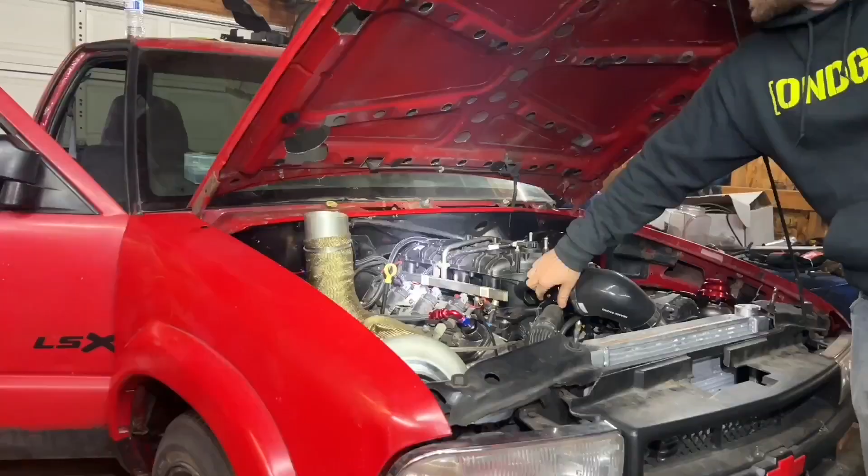We got some snow yesterday, big time. We got like 10, 12 inches of snow. So I figured it'd probably be a good day to mess with the tune on the red truck that I bought. For those of you that don't know, I bought a 2003 1500 HD Silverado, 6.0, 4L80. I've already unlocked the computer, and since we're kind of waiting on weather for the S10, this is the next project, kinda.

So what we're gonna do plans-wise, this truck is getting a cam, springs package, Sloppy Stage 2, PAC 1218s, and we're gonna do a 7875 VS Racing turbo. And it's gonna be basically a daily for me. So I did get rid of the diesel. I traded the diesel for this, not straight up. I traded the diesel plus cash, and there's more than enough on top to do everything I want to do to this and then some. So I think it's going to work out good.

It's not that I hated the diesel. Guys, I can't do anything to a diesel. It's already got a tuner and stuff. I don't want to dig into anything else. This is cheap and easy to work on. So I would like to do a setup where it's on about 10 pounds daily, and I'm going to run a boost controller. I would like to tow the car, low boost obviously, probably no more than 4 pounds of boost towing. I don't really need to explain why you don't want to tow with a lot of boost.

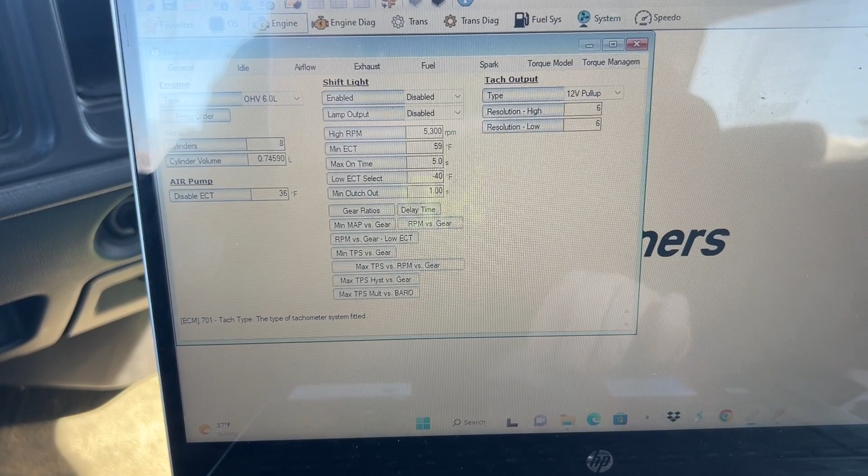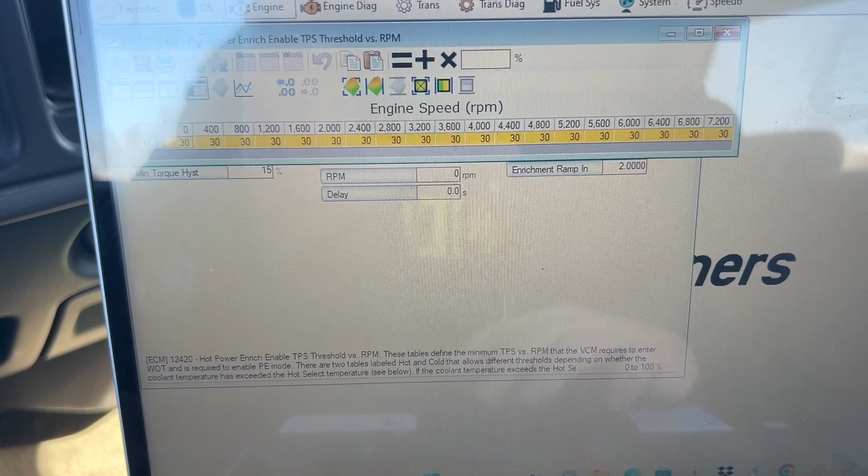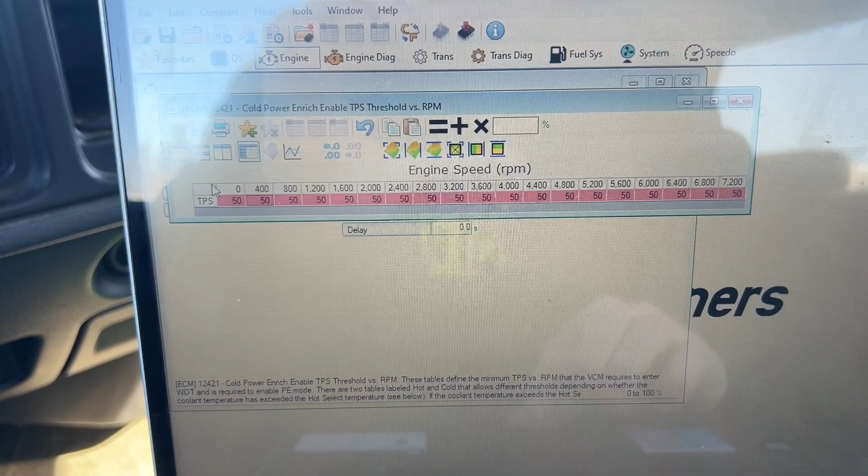All right, sorry about the glare again. I don't know how to really fix that right now. Where are we? Power enrichment. Okay, we'll go hot. See, I got that at 30, so we're gonna put that back to 50. Same thing for cold. 50. All right, I'm just gonna save that. I don't really need to make a new file. It's an easy change. Okay.

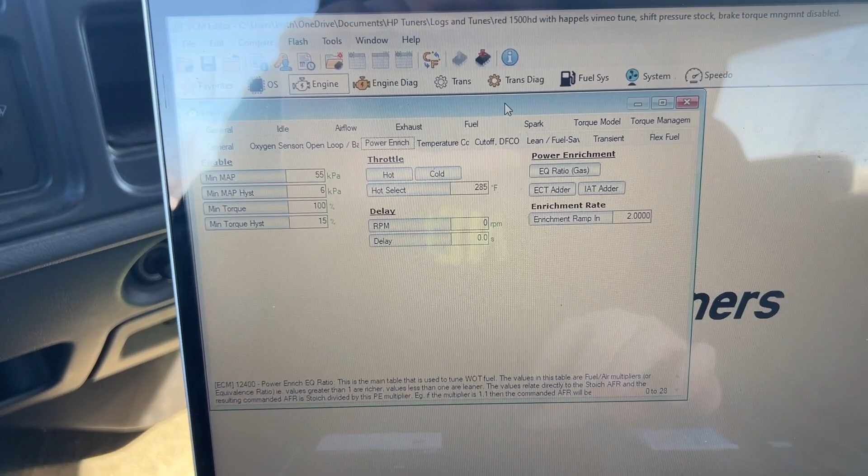Oh yeah, look at all this, guys. Look at that, man. Could hit a jump. Looks like someone already tried. Put some power in this thing. Do some jumps.

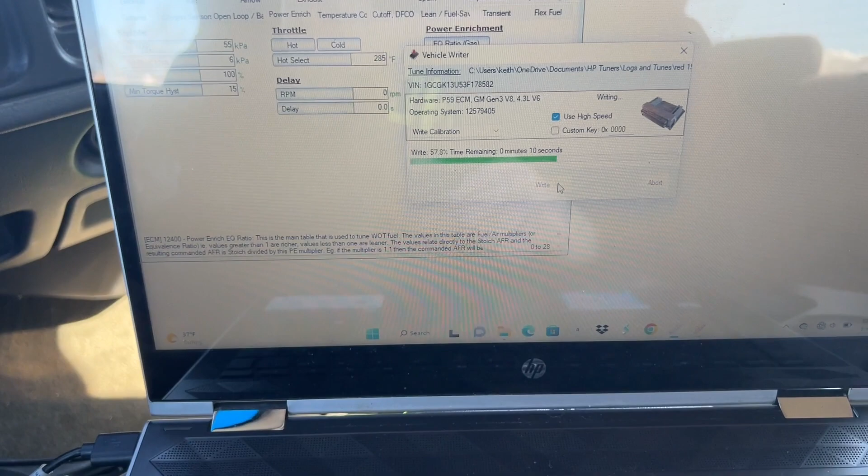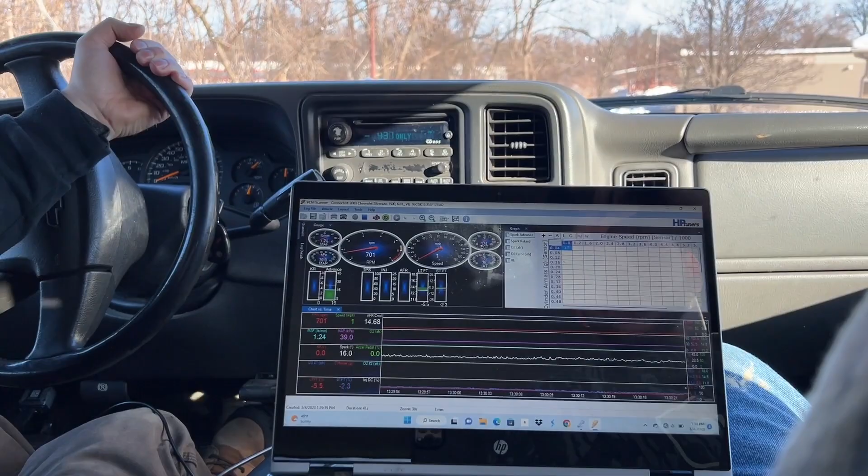It's filming right now. Awesome, here is Austin. All right. Put my safety harness on. Safety belts first, kids. Safety harness. We're all about safety here. You might, not right this second, but you might take it to show them on the screen. Okay, there we go. Yeah, it's probably going to be hard to see. Now that I'm right here, there's shade.

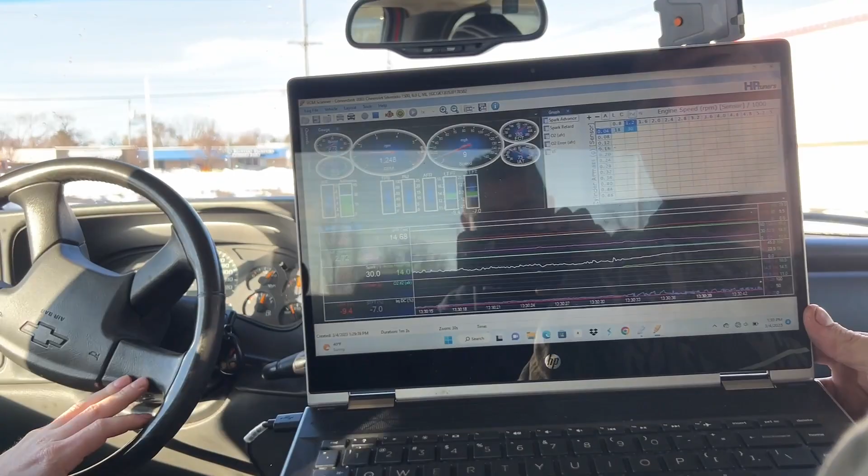Shadow. All right, guys, so funny story. That last clip where you saw me writing the file. Driving home, I actually filmed a pull, and everything worked out like we wanted it to. I got home, and I had so much used up storage on my phone that it cut the video. So, it's all good. Austin and Skylar came over, so we're just gonna basically reenact that, do another data log to show you guys the changes we made and everything.

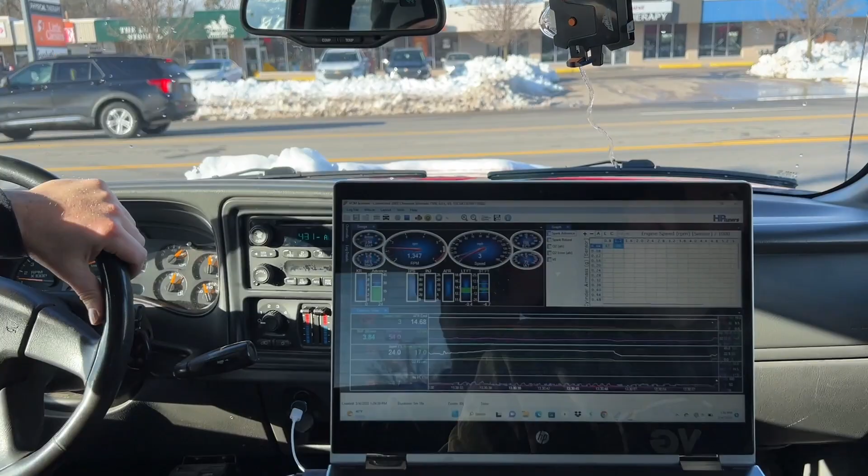So what changes have we made? So here's what I did. I wanted power enrichment to come in sooner, because on these stock trucks, with the stock file, if you floor it, the commanded AFR is 14.68 across the board. So when you're at 5,500 RPM full pull, stock, it's still at a 14.7. This data log right now is all real time. So it's not getting any fuel, therefore you're not getting much power. And it's also programmed to have power enrichment come in after 5,500 RPM for over 60 seconds. Think about those numbers. You'll never hit power enrichment.

So I upped the amount of fuel that goes in, and I cut those times to 0. So I zeroed out time, I zeroed out RPM. So it's instant, well, it's off the pedal. Right now I have it set to when it's 50% throttle and over, which on this is different because it's drive-by wire, it'll get up to like 63%, but that's full throttle. It's weird, drive-by wire is weird. But I have it to where it activates after 50% throttle. So around 30 to 35, you should see this AFR command change.

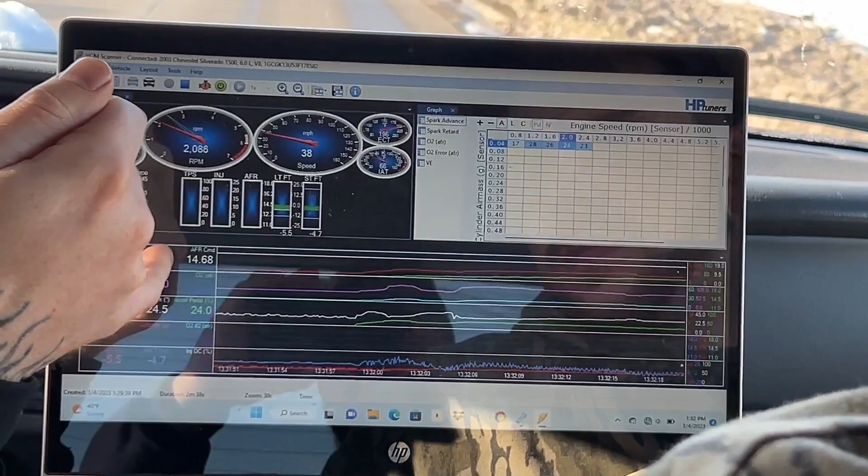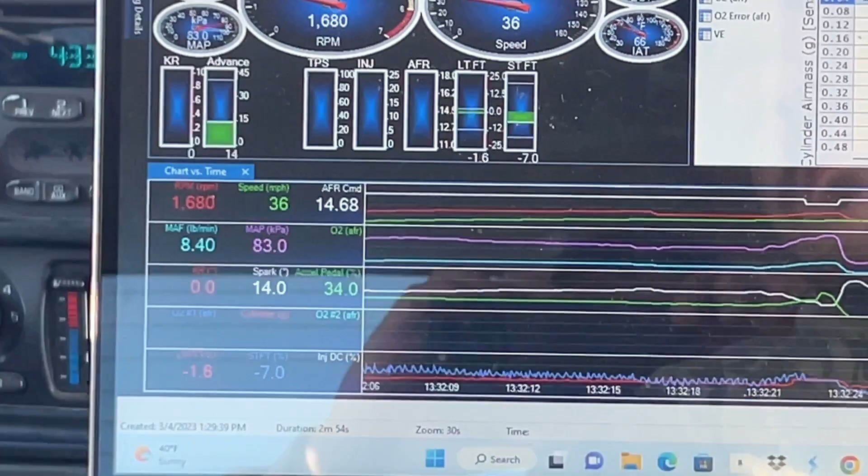So let's try it. Did the number change? AFR command. Only look at this number. So 14.68. When I get past 30-something% on my accelerator, it should change. Okay, sweet. We'll data log and see exactly when it does. Hey, there's a cop. You're at 12.26. Perfect, that's what I'm commanding, so that works out good. So we'll slow down here and just kind of roll into it and see if it's pulling any spark. I was looking at the spark.

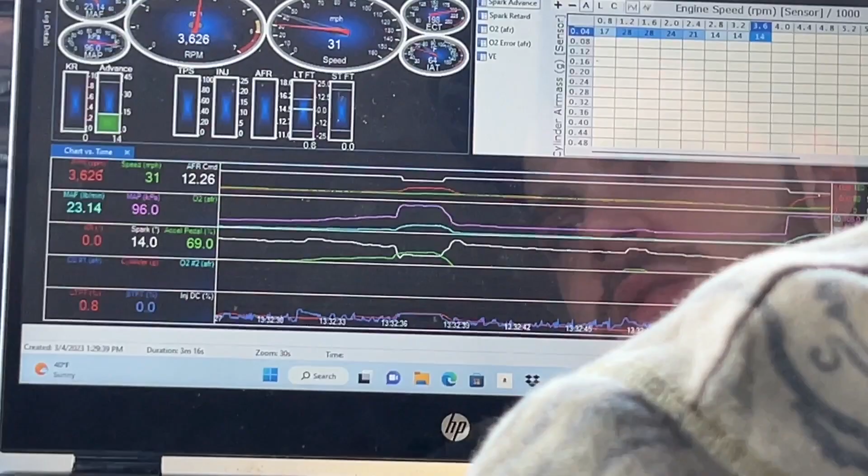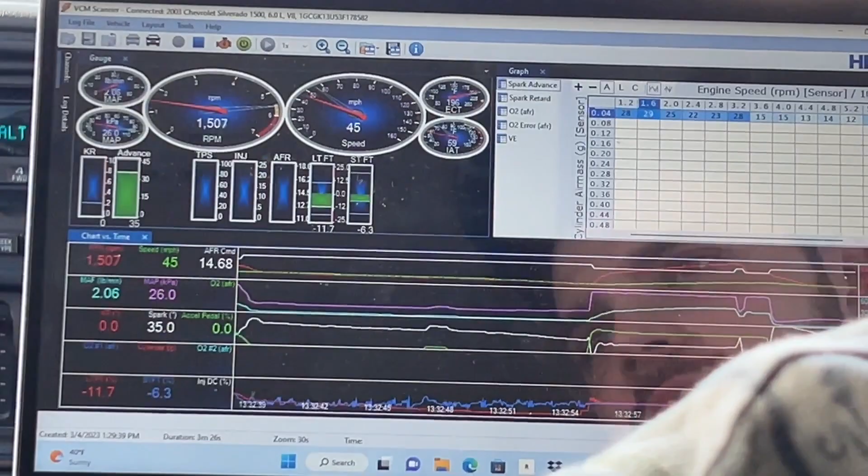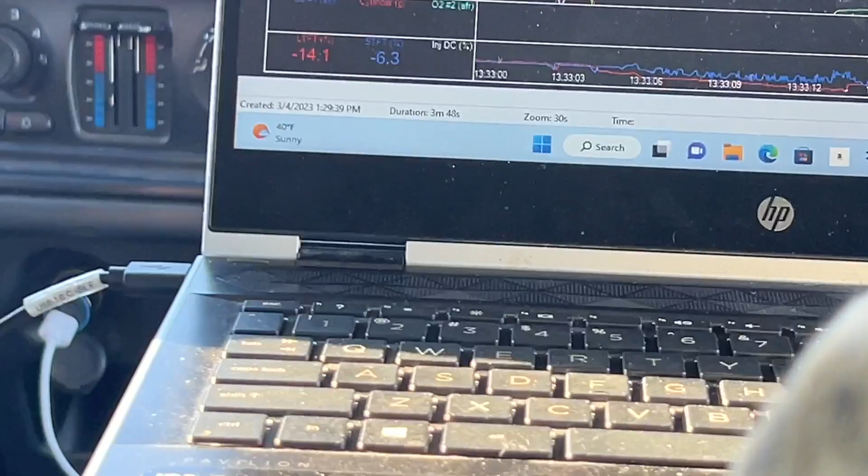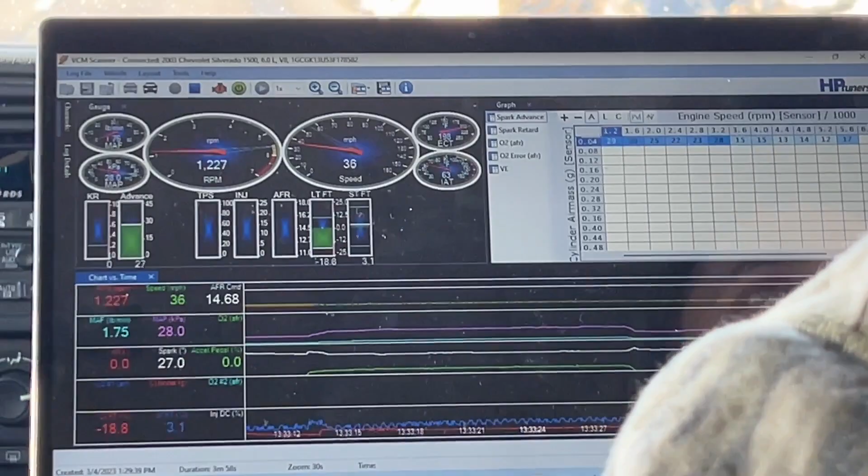14 degrees. 13.5. So 14 degrees of timing? So that's low timing. And I know why that happened. I put my low octane table and copied it to my high octane table, so I can change that. All right, so let's pull over and make that change real quick. But it worked, right? Yeah, it was at 12.2 across the board, and then it was doing its thing. We'll do a couple changes right now, and we'll do it again. I should make the tables the same, but I'll do that when we do the cam and turbo and everything.

Okay, so I added that table back in for the high octane, the timing. We should see more timing, because it was right here and it was at 14. It should be at 16 right there? No, it should be about 20, 21, I think is factory, because I haven't really messed with the timing table as far as numbers individually. Why are you down to like 16 right now? Oh, because that's normal. Stopping, dude.

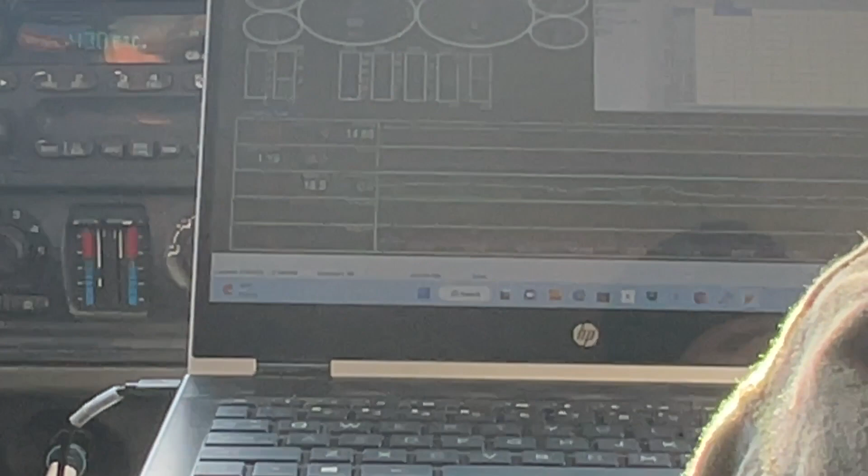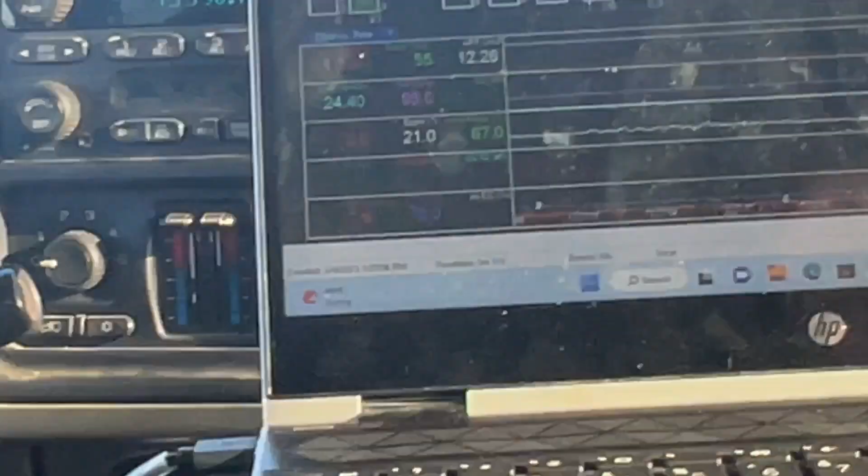All right, Skylar, are you ready? Yep, I'm filming the computer. Yep. 12.2, 20 degrees. Oh, there we go, yep. 20, yep. 12.26. Yeah, dude, we're good. That felt a lot better. That felt way better because it's got timing in it now. Right.

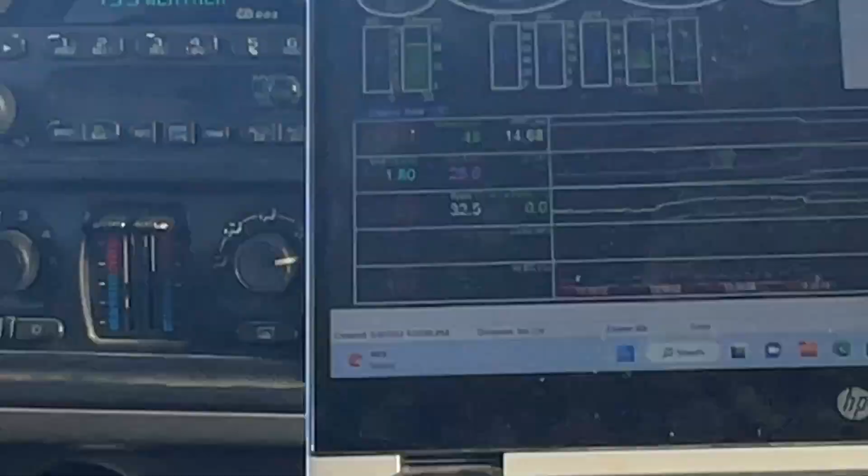Yeah. Not bad for a stock 3/4 ton truck. It's not fast by any means. No, but compared to a bone stock file, it moved. It's not even that it's fast, it just drives so much better. You can feel when it's starting to fuel up on the stock file. It's like, come on, let's go. But now there's fuel going in, which is cool.

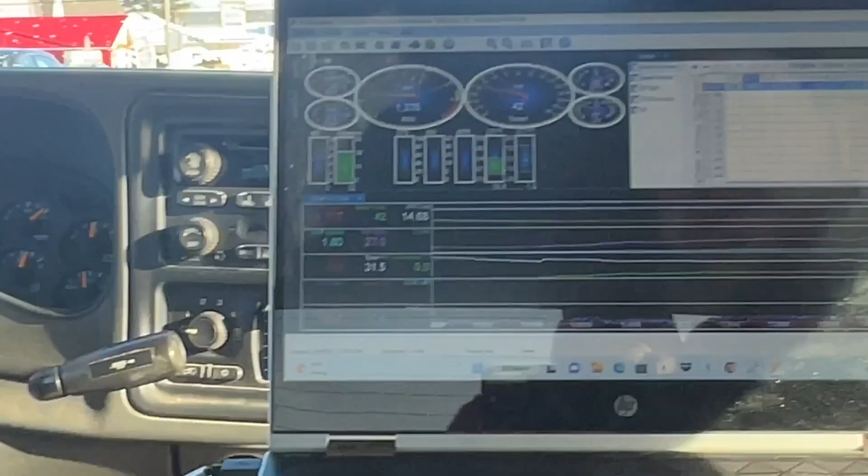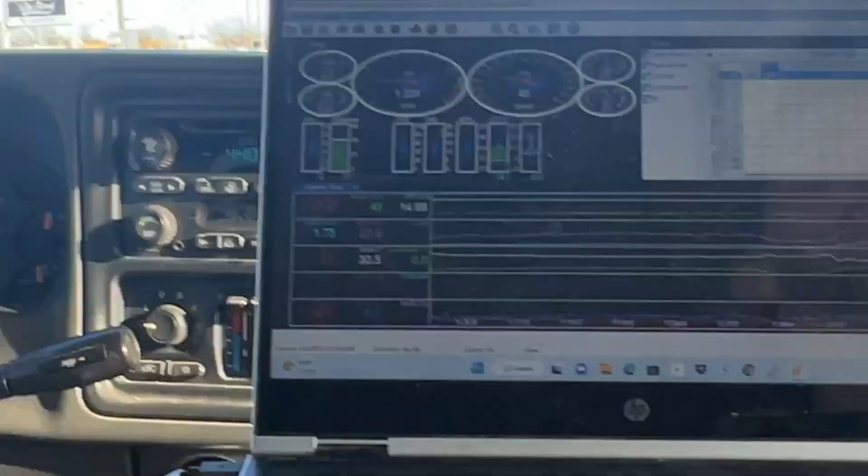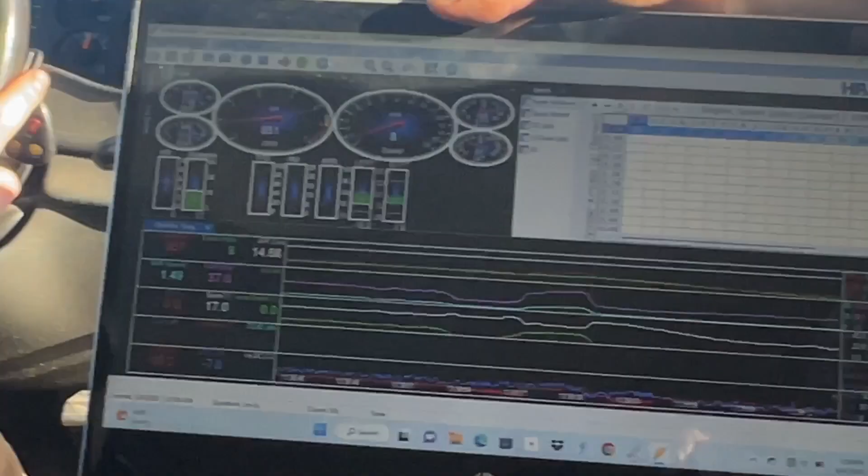Did you do the trans too, or no? No, this is stock. The only thing trans-wise is the shift timing is a little bit quicker. But it's stock pressures, which is something I had in the last file for some reason. I had weird shift pressures. And I had the RPMs to where it was shifting at 57. I don't really want it to do that. So.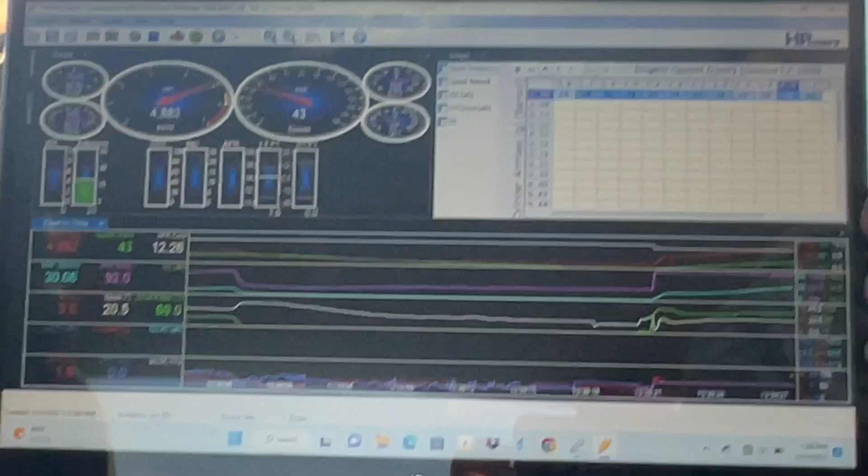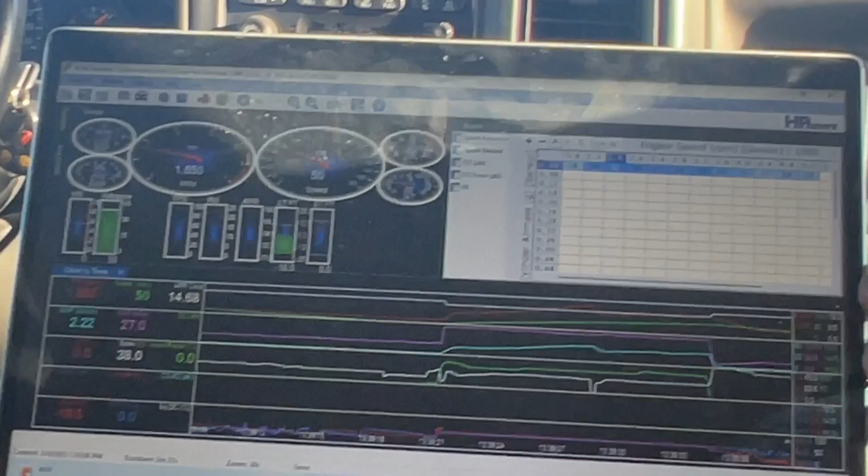I don't think it'll spin a tire, but let's try. Oh, ooh. We're doing a race right now. Look at this. They want some. They don't even know it. Oh, man, they're going for it. Dude. Woo. We just raced a Subaru Forester. No way. Why were they racing? They're old. They saw it, they want to race. Dude, that was the best thing ever.

We are on closed roads, you know. We're on closed roads, yeah. We're just sitting here tuning, and all of a sudden we just raced an old man in a Subaru. What just happened? We didn't lose. It's like a brand new Subaru. Oh, he's so mad right now. He wants some. Is that a woman? No, that's a man. It's an old man. Dude, that just happened. Broke this cherry here, his first win. I guarantee this truck's never raced anyone. Maybe a Segway. God, that was awesome.

Did you get the car or no? No, I didn't. Oh, Skylar! Oh my goodness. Listen, I'm trying to get. Jeez, everybody's racing today. Look, it's my old truck right now. Literally? Yeah, that's my old truck. That's my youth pastor. Listen, I was trying to give the people what they want, the readings of the computer. No, you're fine, Skylar. Jeez.

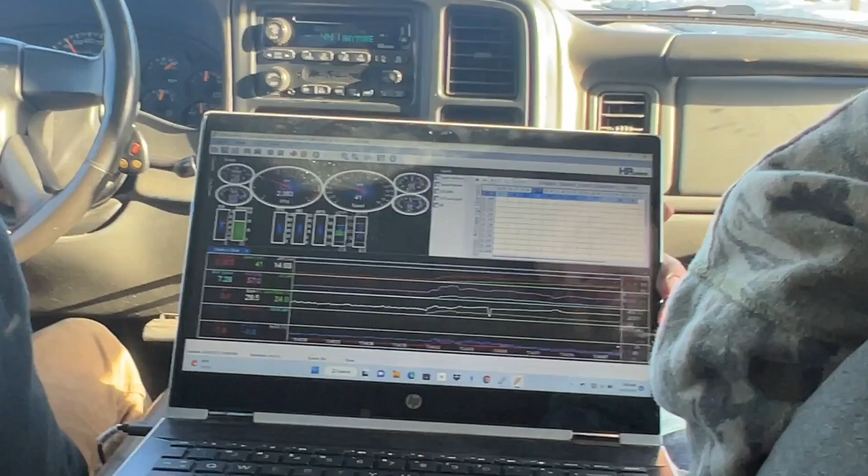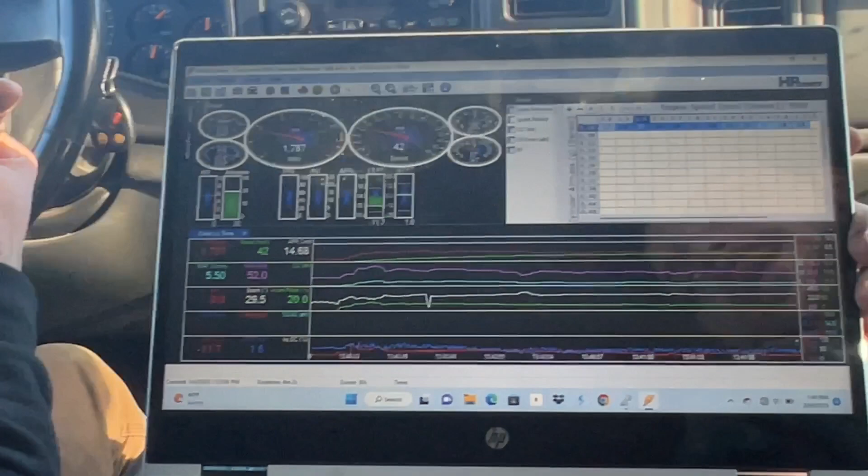Can't please everybody. So cruising, honestly, we should have a little more spark timing in here. I feel like 29 right now. That's fine. We're at a 14.68 AFR command. What's the accelerator? 22% right now. So we'll go over this data log with the camera too when we get home. And it's only when we get over 30%, right, is when it goes down to 12.

So yeah, what I have in the computer is 50% throttle, which on this, I'm pretty sure on the percentage, because it's drive-by-wire, it goes up to like 63 or 65 or something. So half of that is low 30s, is when it should kick down to a 12 when it goes over 50. So we'll head home and we'll confirm if that's the case. Okay. So a little math involved, but not an ordeal. So, all right.

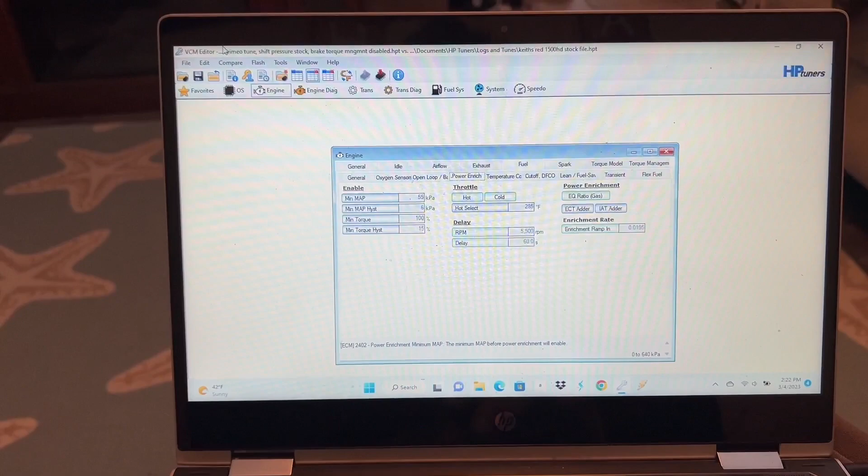All right, before we go over the data log we just did, just want to show you the changes that I made. I do have another video on this, but we'll just go through this real quick. So on a factory vehicle, factory truck like this, Silverado, look at your delay here. So we're in power enrichment, go to fuel, power enrichment. Your RPM, 5,500. Delay, 60 seconds.

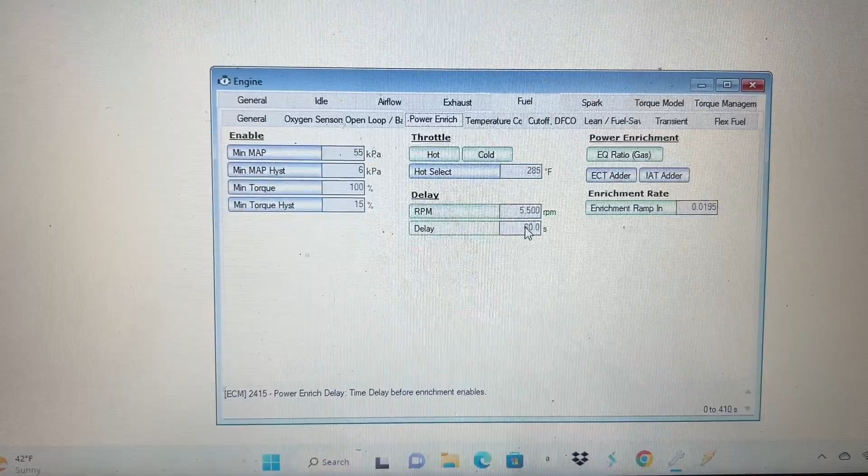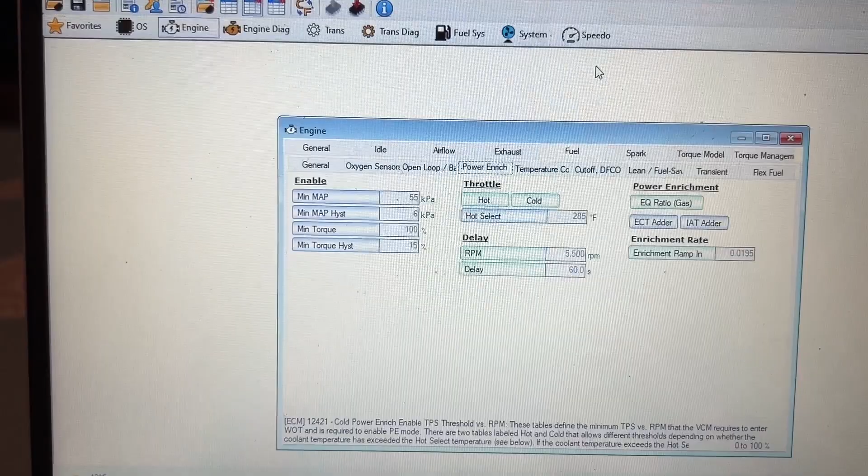So in other words, you have to be over this and over this before PE activates, power enrichment activates. So this is never going to happen. In throttle, you have to be 90% throttle. That's hot and cold the same. Yeah, so it's not going to happen. And another thing, this is your stock deal for power enrichment.

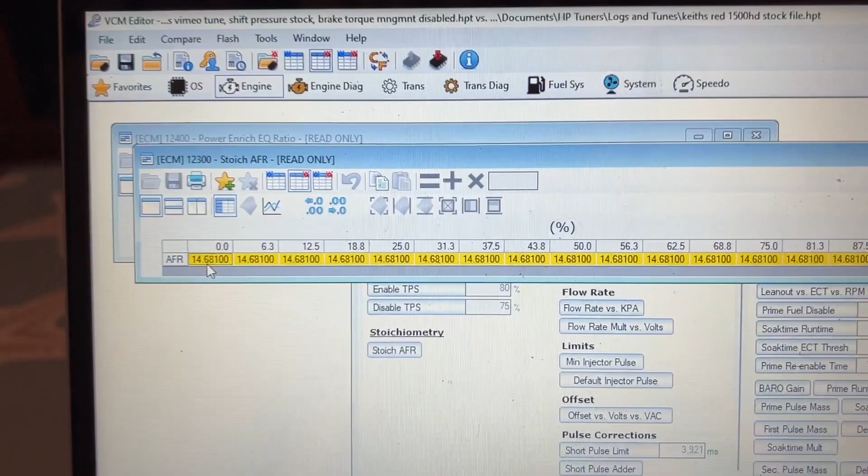Now your ratio, right? So it's commanded, let's see, where are we here? New general. All right, so stoich AFR. So this is what it's commanding for your AFR, 14.68 across the board. Now what power enrichment does, it multiplies that. So when you do, say up here, high RPM, a 1.2, it's adding 20% to that is what it's doing.

So in other words, if we go to a calculator here, oh, what's going on? Don't freeze up. Don't freeze up. Okay, sorry about that. We got this open now.

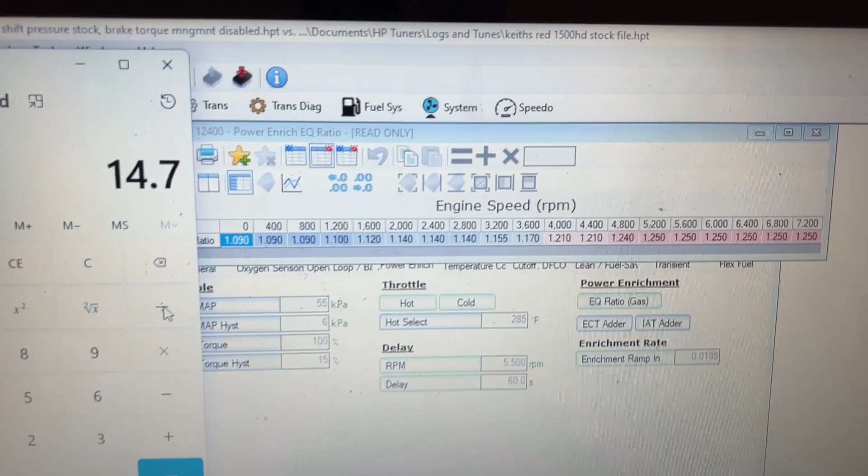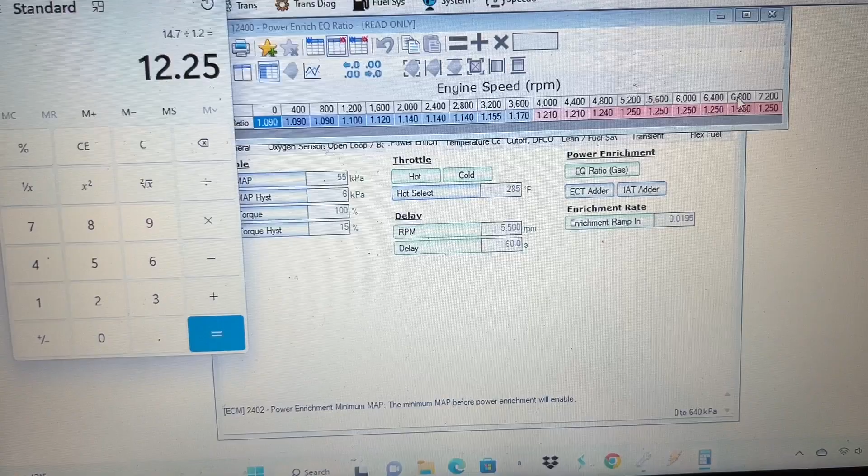So your stoich was 14.68. We'll just do 14.7. Now, if you look over here at what you got this at, so let's say high RPM 1.2. You divide by 1.2 equals 12.25. That's what you're wanting. And you can have that this high, or what I like to do is I like to make this 1.2 across the board, because this is what I want when I press the gas pedal. So that's what you change.

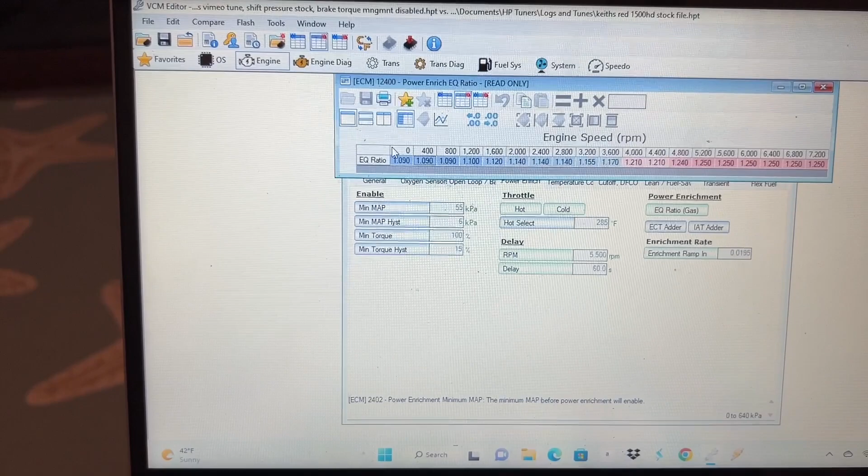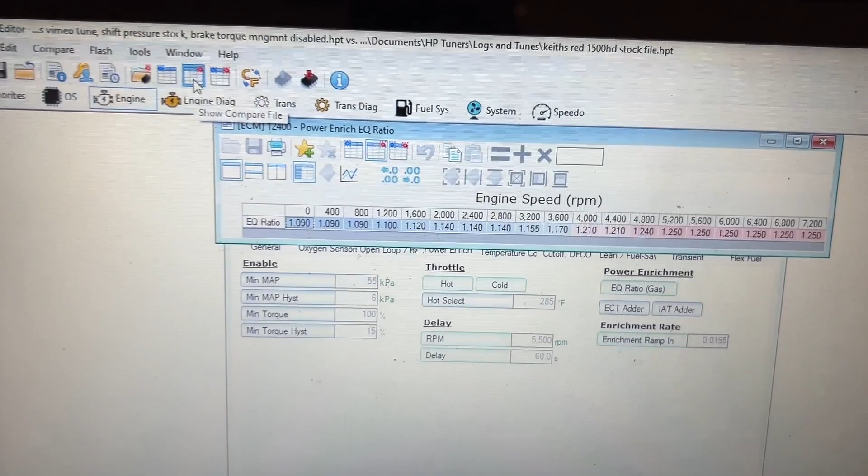And you can just do 1.2, enter. Whoops, no. 1.2, enter. What's going on here? Bear with me. Oh, it's read only. That's why. I'm sorry, guys. I just have a compare file open. So on my changed one, I just put it 1.2 across the board. Normally you could change it, but I have that as my compare file, and it's read only. So this is the file that's opened up. That's what you would change it to.

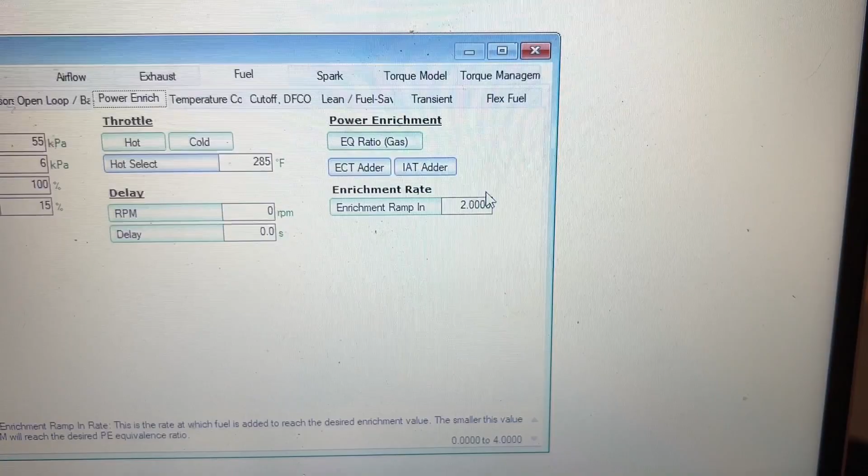And like I said, you want to change these, just zero these out. Your enrichment ramp in, as you can see, the numbers are 0 to 4. And I usually do about half. That's what Happle does, honestly, I kind of copied this from Happle. You know how in my video you see it goes from like a 14.68 and gradually ramps into like a 12.2. I think if you put this to 4, it'll be immediate, like 14.6 to 12.2. So you want a little bit of ramp in. So you can keep that at a 2.

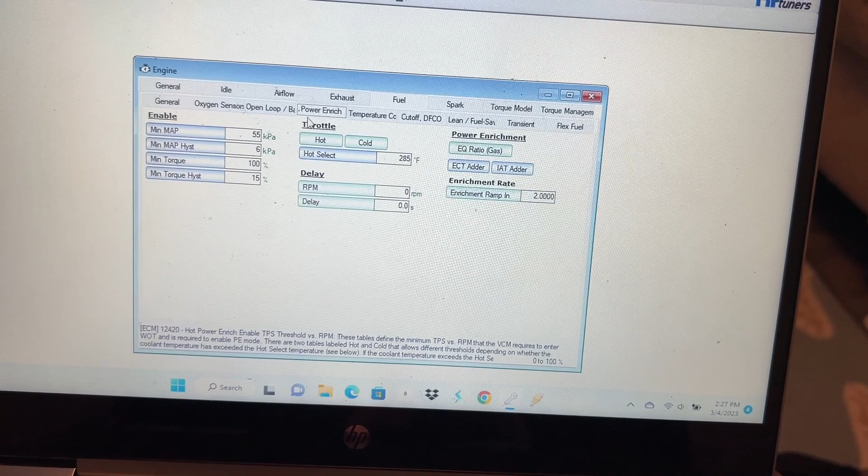And then on my throttle, I want 50% throttle instead of 90. It'll just make it drive a lot better. There's other stuff you can change, but that's pretty much the gist of it. Just play with these numbers.

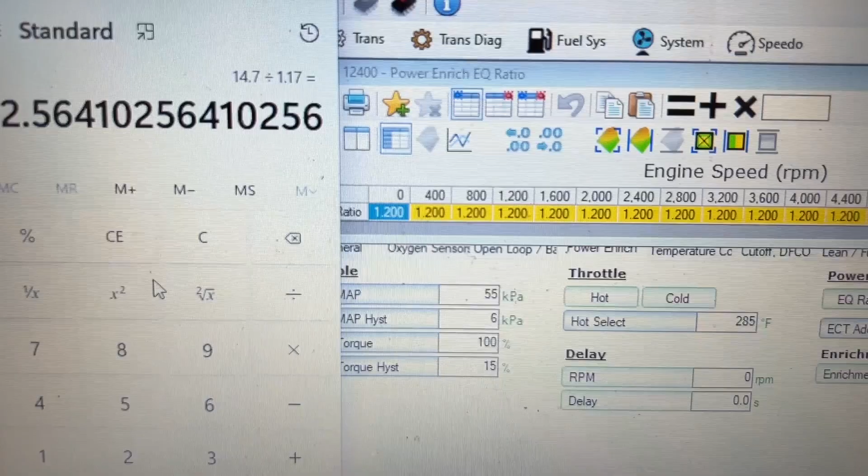Say you wanted a 12.5, excuse me for this. So 14.7 divided by, instead of 1.2, we'll do 1.17 maybe, equals. See, there's a 12.5. So if you wanted a 12.5, you wouldn't put 1.2, you would put 1.17 across the board. There's a little bit of math involved, but this makes it really easy. If we did a 1.17 across this whole table, then instead of a 12.2, we would see a 12.5. So that's how you do that.

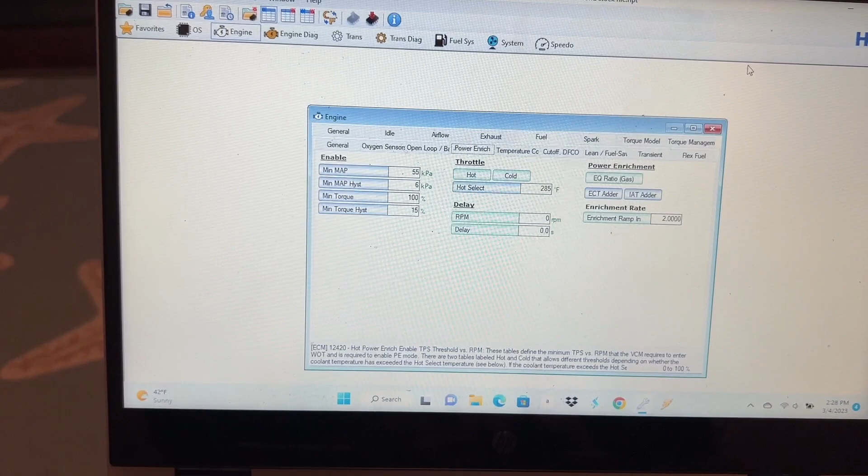Pretty straightforward. Once you do it, you're fine. It's real easy. You do these little changes, and the truck will drive a lot better, for this truck anyways. I'm sure you could do the same thing with a half ton. I wouldn't do much with a 4L60E, to be honest, but these 3/4 tons with a 6.0 and a 4L80, you do this, they drive so much better.

And I wish I had a dyno. I wish I had my AFR even hooked up so we could really make sure we're getting the 12.2 we see on our data log on the actual AFR. That's what you really need to do. And we will do that. I just don't have it installed yet.

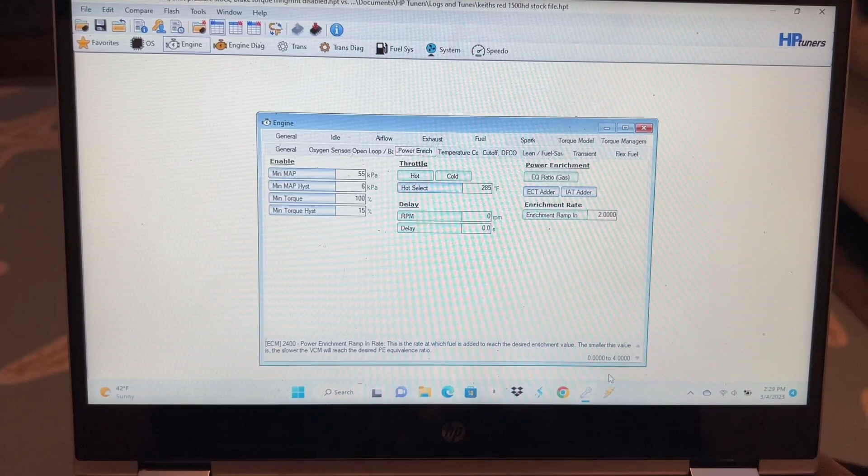So, but that's what you're gonna see in this next clip of the data log we did. So this will just give you a head start on that.

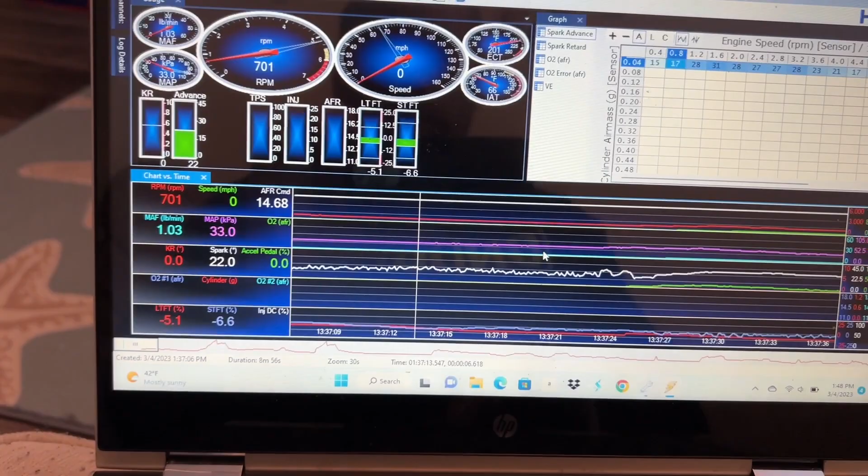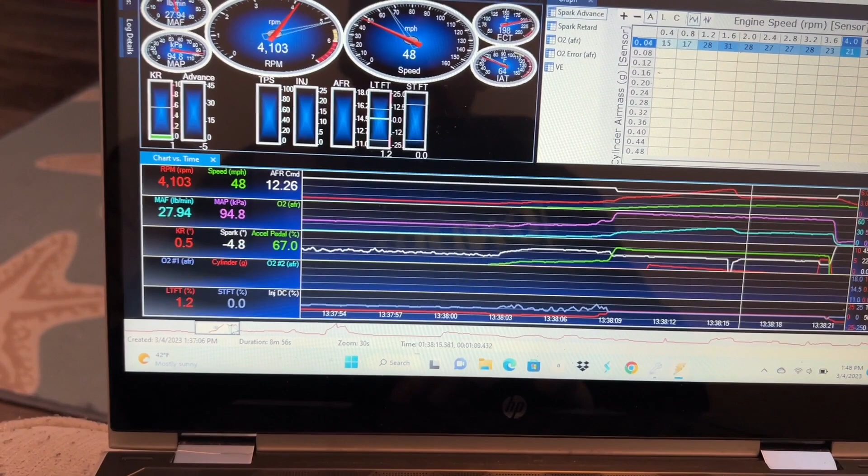All right, guys. So that last little run we did when we raced our Subaru. Let's see. All right, so this is when we were leaving. Just get in here. So just to show you that everything is working the way it should. You can see we're cruising 14.68. We're at about 22%. I'm just gonna go by percentage here. 25, 30. Whoops.

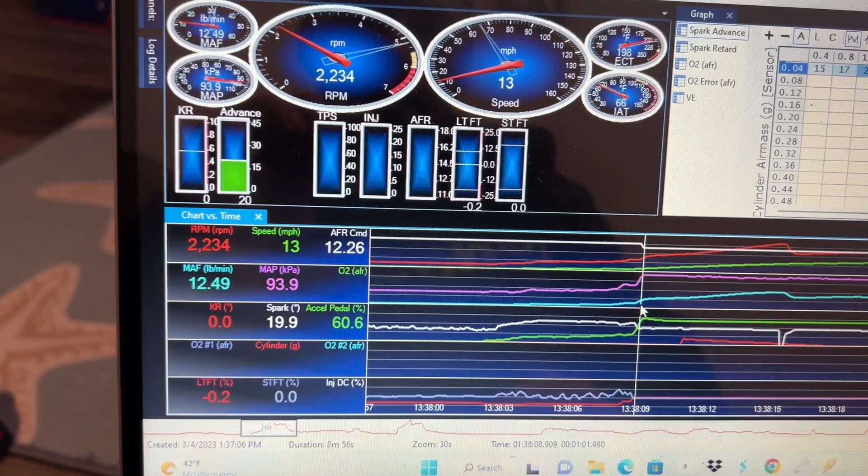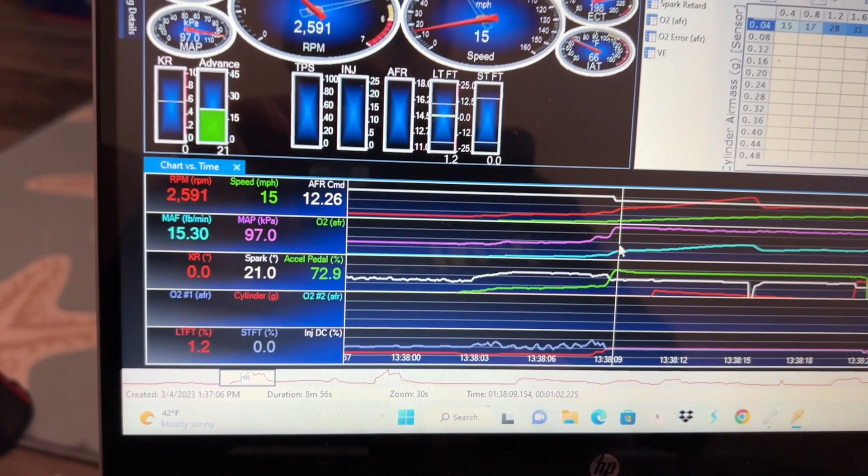Wait a minute. It actually doesn't come on. I wonder if there's like a delay. I bet there's a... Oh, it is at 50. See, it does something weird, doesn't it? It wasn't doing it at 32, 33. So, okay. So maybe we are right on the numbers. 50%? Or not 50. 50 throttle. 50 throttle, maybe, yeah.

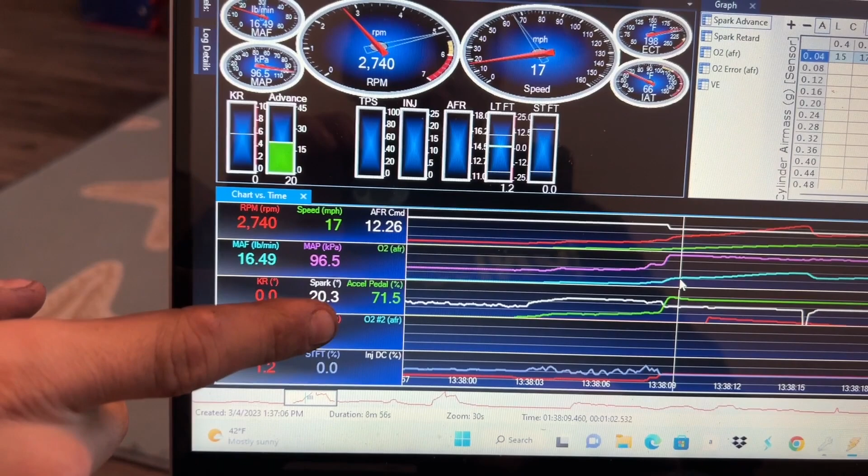So, it's just so weird. Actually, look at this, though, dude. All right, here's what's weird. Accelerator pedal. Go back down. Why is my percentage all over the place? Now it goes up to 71%. And then it flatlines at 67. Were you on the ground? I was on the pedal. Really? Pedal through the floorboard.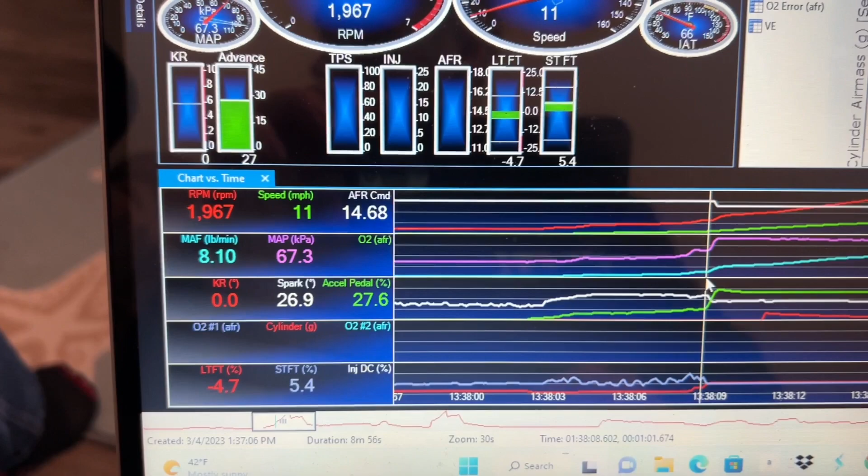I got to look at this, guys. I don't know enough about this drive-by-wire to figure out what's going on here. I bet there's a table in the tune that kind of calculates that. I have no idea. But anyways, you can see here. You know what I wonder? Does it have traction control or anything kick in and bring it down? I don't have that traction control in that truck. So, oh, there we go.

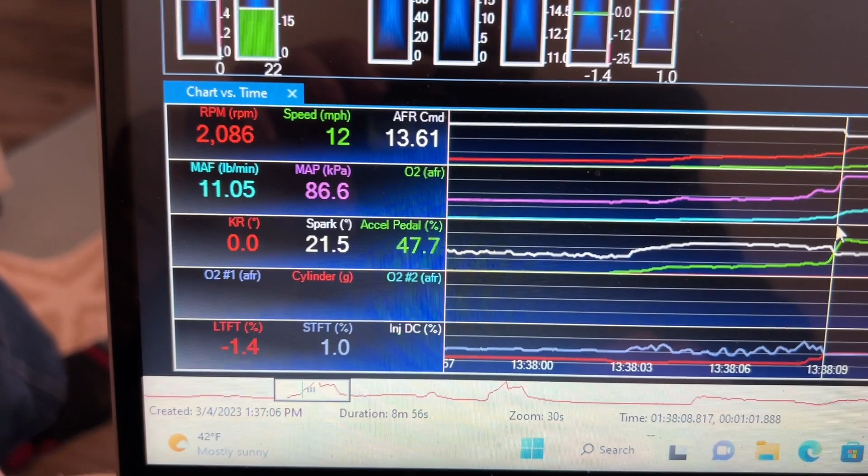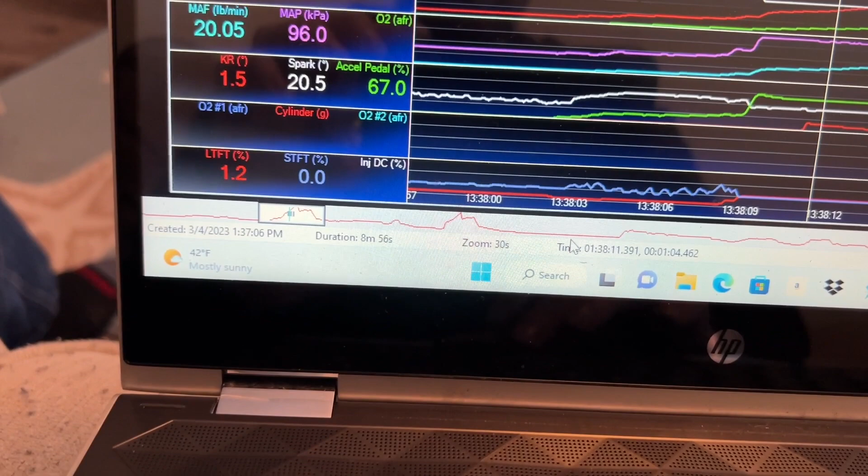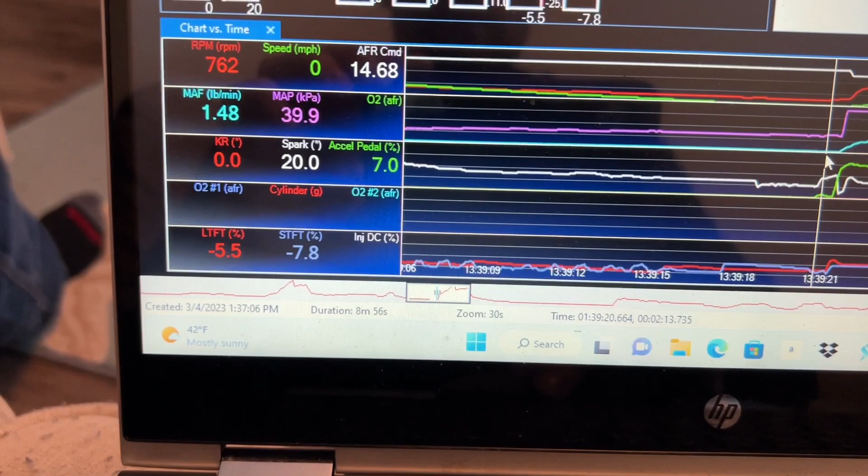So this starts kicking in just before 50% throttle. But it doesn't go down that much. Oh. Yeah, it ramps down to 12.2. So when we're full throttle, it's a 12.2. Now, we did a test though. Let's see when we race that Subaru. Look at that, 78. Yeah, but then it tapers off at 69. So this is where I just stomped on it, right? Yeah. All right, so it didn't come on. There's a delay. There's got to be a little delay in there.

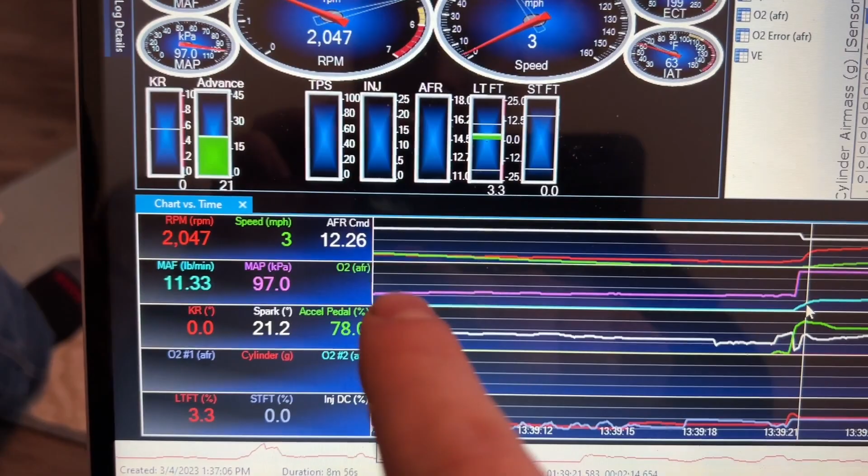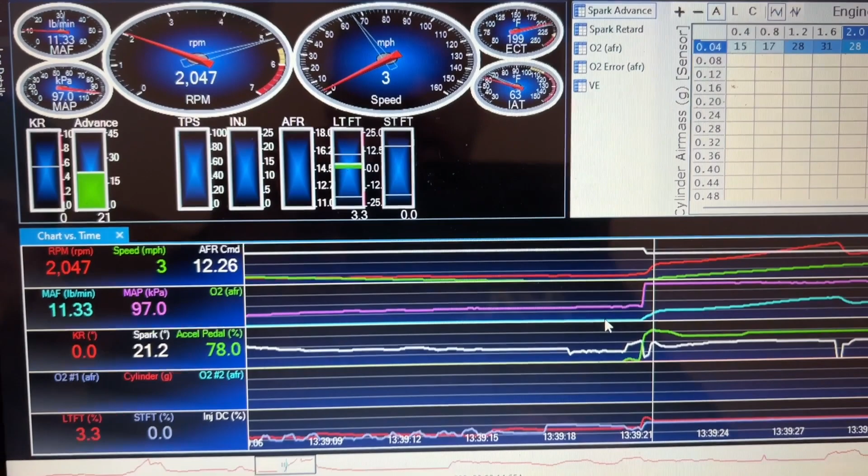So, all right, guys, so I got to figure this out. It's not a problem because it's working. Like, we're obviously getting that 12.2 that we wanted, and we're seeing that. So it does drive 1,000 times better. It really does. But we're getting everything we want. It's not pulling anything. I kind of turned off all the multipliers for when it takes out timing and stuff like that. I turned all that off. So just because of temperature or IATs, it doesn't pull timing unless it's like really hot.

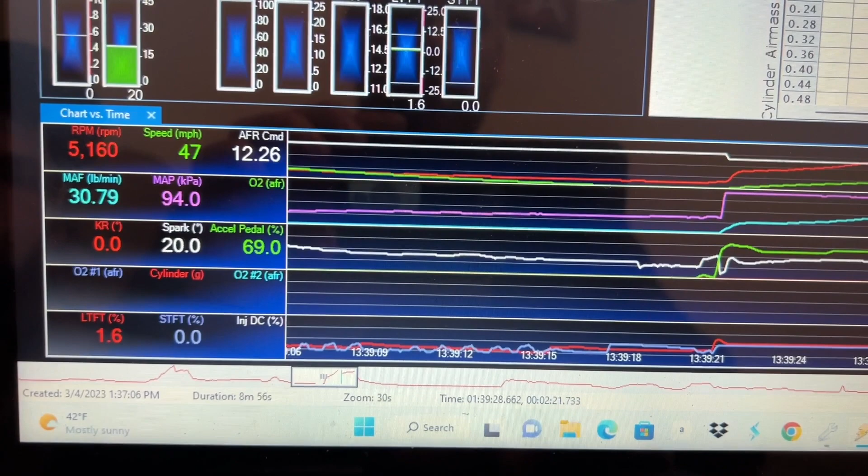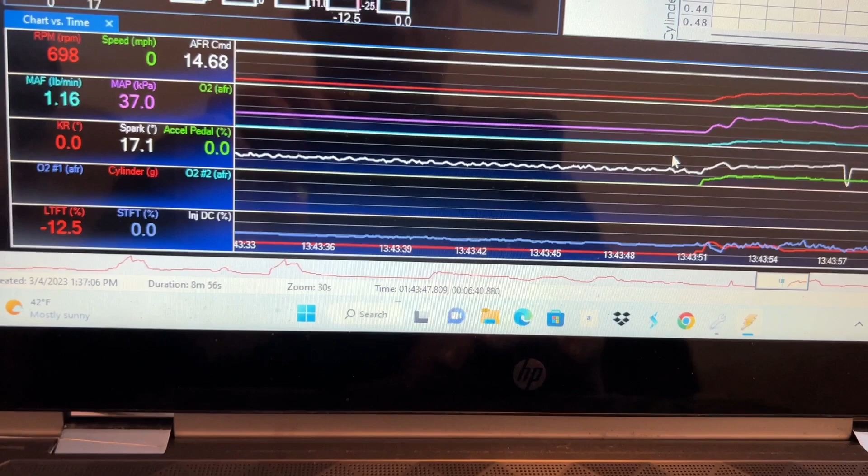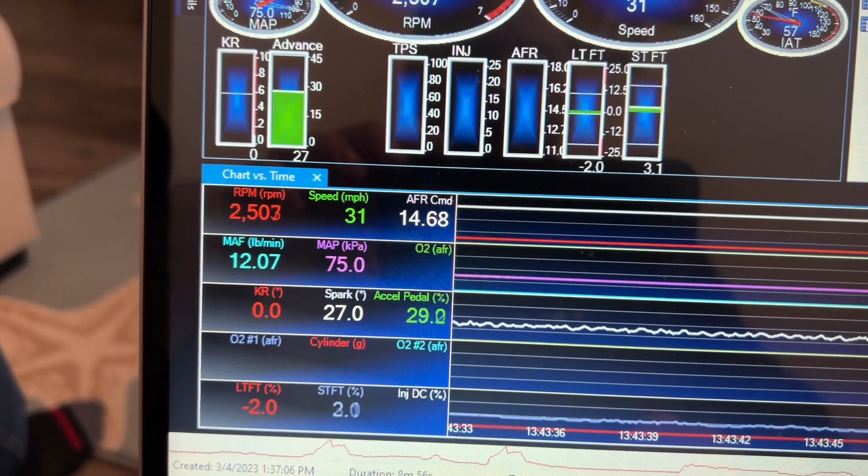This is obviously a shift right here. Comes down. Whoa, yeah, 12.2. So you can see that's working. That's working real good. And then on the way home, this was just not stomping on it, but seeing when we could get it to work, because we flashed that. It never went down. Wait a minute. At 33, 34%, it never went down. I'm telling you, it's going to be in the 50s.

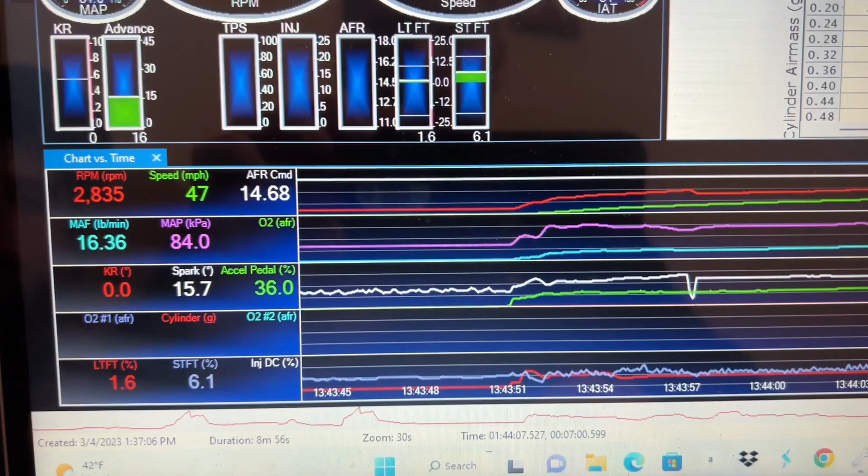Yeah, it's right here. Here, this is when we were just kind of cruising. But see, yeah, look, it's in 30. I don't know. I wonder if there's a ramp and delay. There's so much stuff we got to check on that. There's another table, but I would like to figure it out just for the knowledge purpose. I don't have to change it on this because it's doing exactly what we want. Yeah, this drive-by-wire stuff's a little weird, but we'll figure that out.

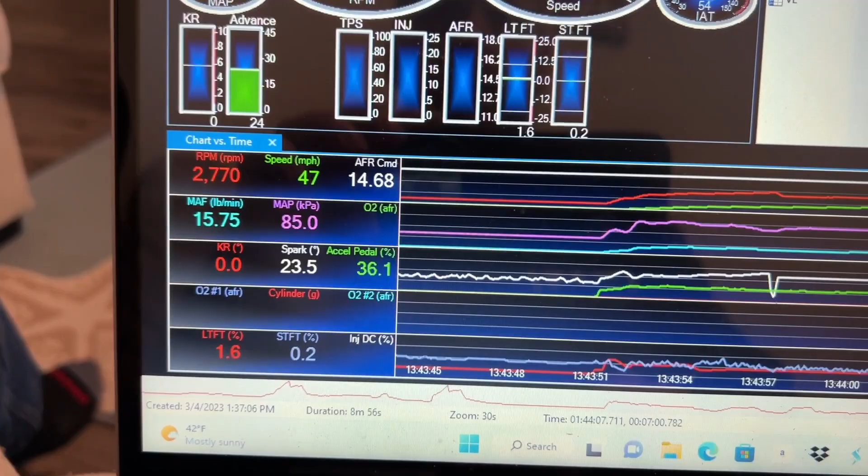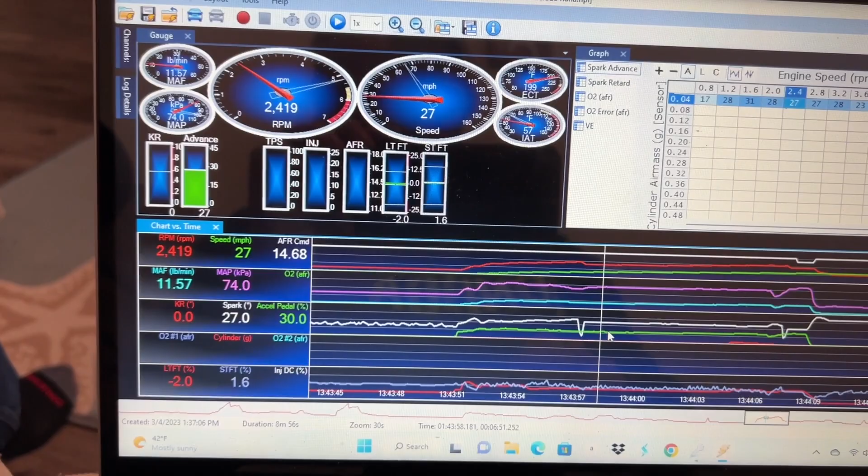Oh, hey, this is when they went to Texas Speed, isn't it? Yes. Yeah. So that's good, guys. Everything's working how it should. Can't wait to get the cam springs, tune it, see what more power it makes just with that, and then we'll throw a 78mm on it and do some burnouts. Then it'll be just a different animal after that.